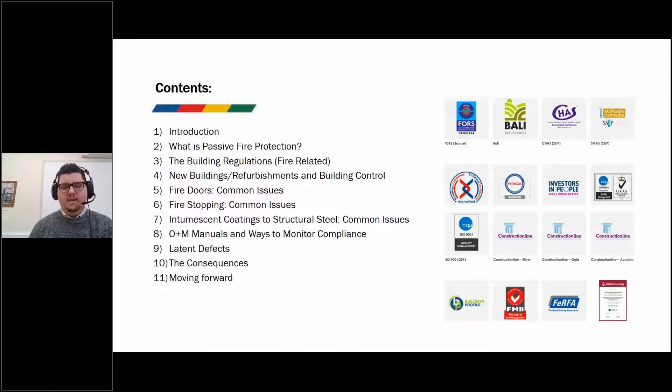So, of course, this is an insight from a contractor, a passive fire protection view, an analysis of the failings, design issues, installation methods and misinterpretations of the building regulations.

The building regulations dictate the requirements around passive fire protection and are aimed at securing the health, safety, welfare and convenience of people using or affected by a building. However, as recent history has shown, fundamental failings throughout the build process have led to destroyed buildings, liability cases, and most worryingly, loss of life.

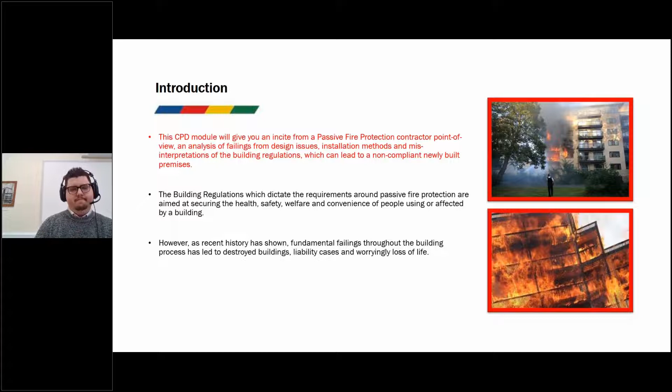So what is passive fire protection? Passive fire protection is an integral component of structural fire protection and fire safety in a building. It attempts to contain fires and slow the spread. We refer to these in the industry as fire-resistant walls, floors, and doors. These are what we refer to when we say compartment walls, and it must be to a defined and predictable period. I will touch on this a bit later.

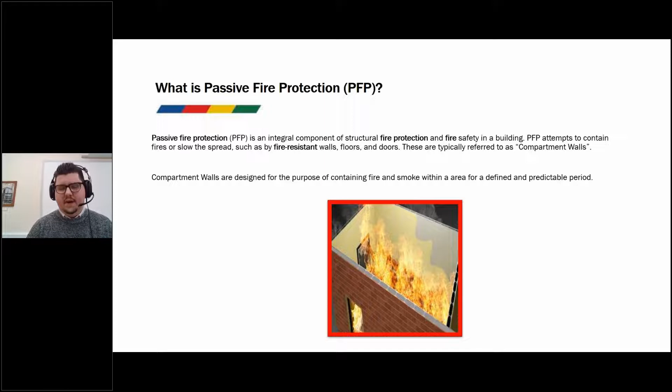So there are 5 main types of passive fire protection. The first one, and most common, is wall fire barriers, which are designed to uphold fire resistance of a wall equal to or above the wall itself.

The second most common type is cavity barriers, typically used within a roof space, which restrict the movement of smoke and flame within such a space. And identical to a wall fire barrier, a floor fire barrier is designed to stop fire spread by horizontal separation between floors.

Fire doors must act in a very similar manner to wall and floor fire barriers. However, they need to allow safe egress. And probably the least talked about element of passive fire protection is structural fire protection - the very structure of steels designed to uphold the structure of the building. They come in 2 forms, an intumescent coating or a fireboarding system, designed to reduce the structural failure time to a predictable level of performance.

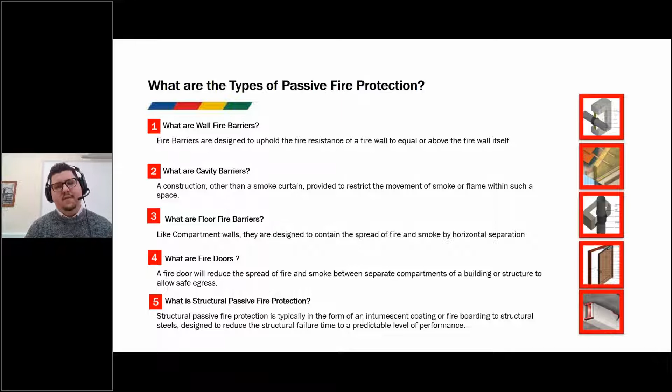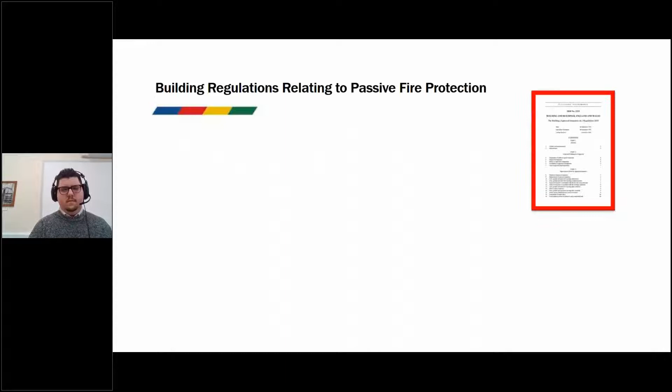The Building Regulations 2010 applies to new and refurbished premises, and it requires that fire-resisting doors and barriers should demonstrate the appropriate performance. However, born out of this document are the approved documents, which provide guidance on how to meet the building regulations in common building situations.

The first most common type with regard to fire safety is a document referred to as Approved Document B. Essentially, it states what fire rating the compartments and doors should be in certain building situations. Approved Document E relates to the resistance to the passage of sound - so if you're cutting holes in walls and installing fire barriers and doors, attention must be paid to the sound resistance between these walls.

Approved Document M is access to and use of buildings - how able-bodied and unable-bodied people interact with buildings to their convenience.

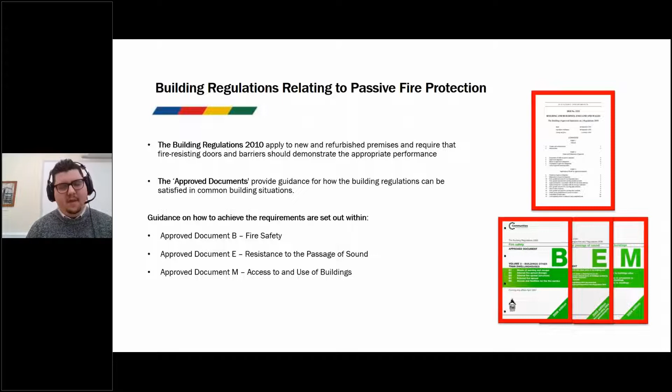So I want to focus in a little bit on Approved Document B, being the specific one with regard to fire safety. Part B of the regulations in England covers fire safety matters within and around buildings. The approved documents to Part B are in 2 volumes. The first volume being Relating to Dwellings, Volume 1.

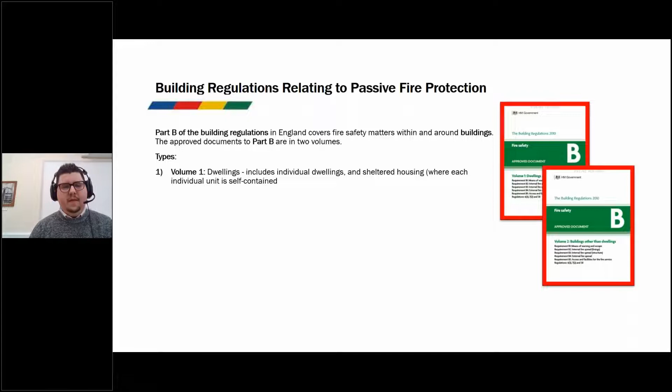It includes individual dwellings and sheltered housing, where each unit is self-contained. Volume 2 essentially covers everything else - all houses of multiple occupation, flats, student accommodation, and healthcare premises as well. It is assisted by some supplementary guidance, such as HTM 05-02, which is specific to healthcare.

There are 5 main topics covered under Approved Document B, and they go from B1 to B5. B1 is means of warning and escape. B2 is the internal fire spread of the linings of the building. B3 is the internal fire spread of the structure. B4 is external fire spread, and finally B5 is access and facilities for the fire and rescue service.

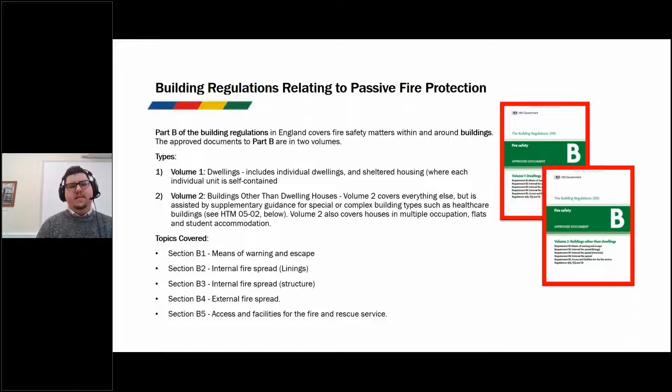Essentially, how the fire brigade gets in and out of the building safely in the event of a fire. All newly built developments must comply with the building regulations and must receive building control approval. Local authorities are responsible for enforcing building regulation. Approval can come through two means, either a private approved inspector or a local run building service.

The role of a building control inspector is to ensure that the technical standards are met, i.e. they perform a compliance role. It is a misconception that they provide a guarantee of compliance with the building regulations, and the appointment of building control does not remove the obligation of the person carrying out the work to achieve compliance.

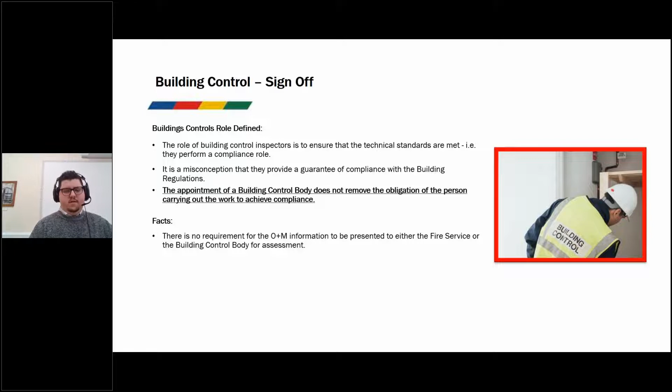Well, let's look at some of the facts. There is no requirement to provide an operation and maintenance manual, which contains fundamental information such as photographs or data sheets, to building control or the fire service on completion of the project. The inspectors are not responsible for monitoring build quality. And if you think about it, how can building control be responsible for what is an estimated 26 trades involved in the construction of a new home? They can't be competent in all areas.

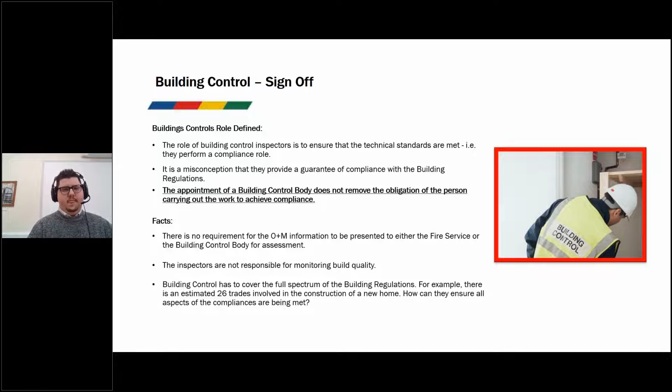I'm going to move on a little bit to fire doors and show you some real world examples and common issues. So what is the difference between a standard door and a fire door? Essentially, a fire door has undergone a test within a furnace, typically in a 3 meter by 3 meter wall, with a door installed and then exposed to high temperatures to measure the rate of failure, resulting in the timeline of how long the door should last.

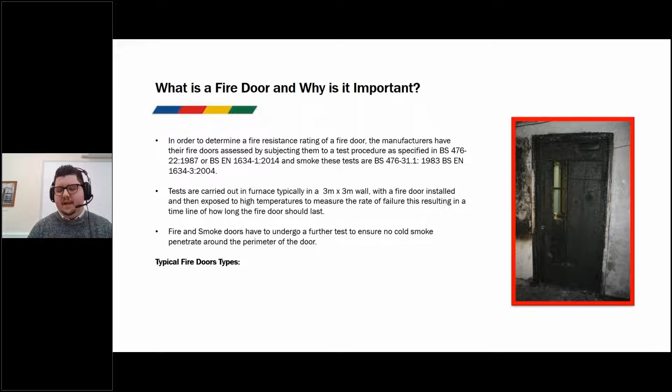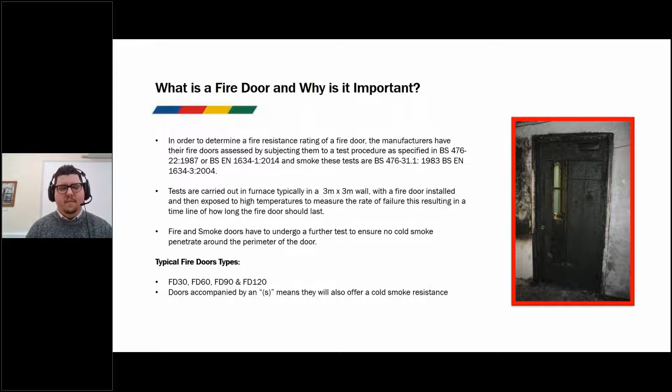Fire and smoke doors, however, must undergo a further test to ensure no cold smoke penetrates around the frame of the door. The typical fire ratings of doors come in FD30, 60, 90, and 120. However, doors accompanied by an S means they will also offer cold smoke resistance.

There are two categories of testing around fire doors. The first is primary test evidence, which in short means that all of the components of a door, combined with its frame and ironmongery, are assembled and tested in a furnace, and it achieves a certain fire rating. Then, from the manufacturer, that assembly is replicated direct to the installer for them to fit within the aperture.

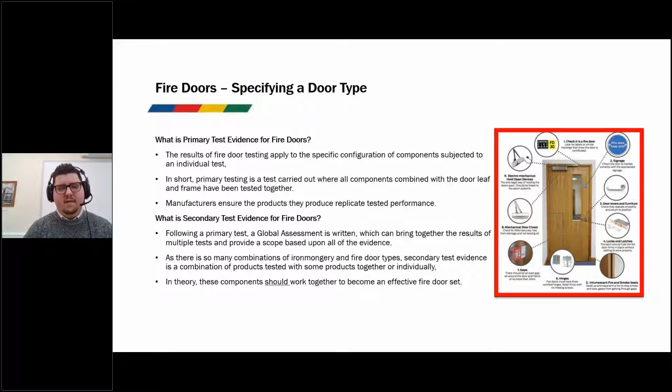Secondary test data typically follows a primary test. A global assessment is written, which brings together the results of multiple tests and provides a scope based on all of the evidence. There are so many combinations of different ironmongery, door types and frames. The logic is that if any of these components were tested together or separately, as long as they've been subjected to the same test, they should work together in tandem in a fire, but it cannot be guaranteed.

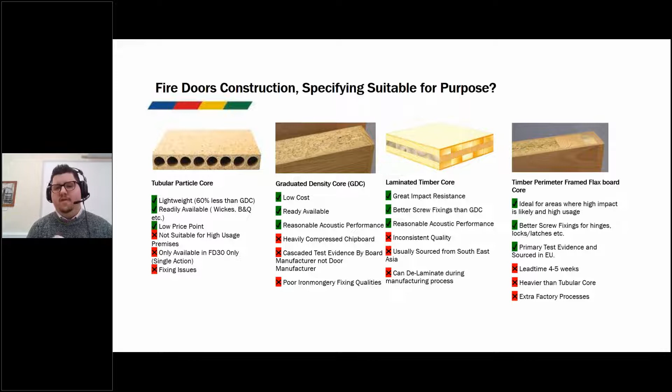We're going to look at 4 different door cores, all of which have been subjected to the same fire door test, BS 476. But visually, looking from left to right, you can see a tubular particle door, which seems less robust than the one on the far right. These types of doors, tubular particle doors, are readily available in places like Wickes and B&Q. As we move through the graduated density cores and laminated cores, right up to timber perimeter framed flaxboard cores, they are suitable for more high impact and high usage situations.

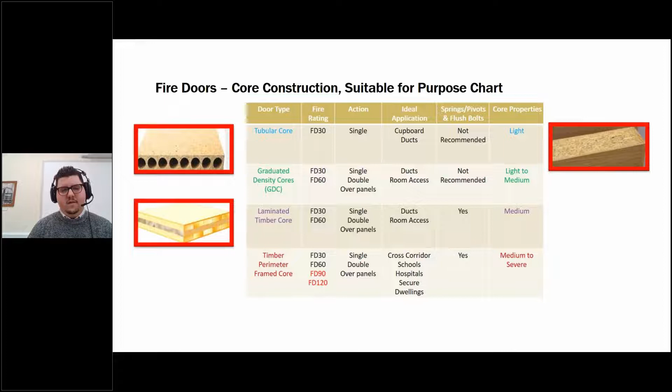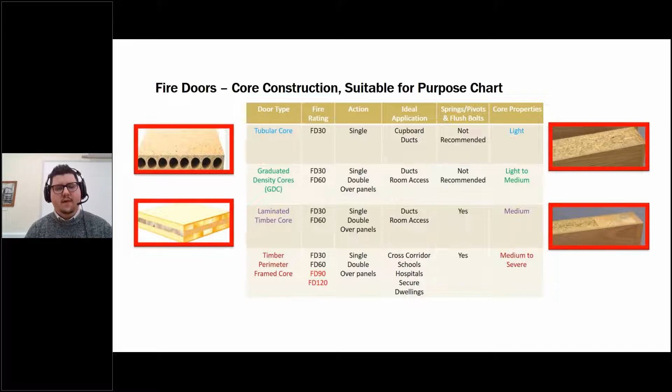Let me explain that a little further. On the top left is an example of a tubular core door. Its ideal application is in a cupboard or duct, similar to our graduated density cores and laminated timber cores. The idea is that the example on the top left is less robust than the example on the bottom right, because those doors open and close far less frequently than the example on the bottom right, which is typically recommended in cross corridors, schools, hospitals, and secure dwellings.

Manufacturers which supply doors specify key guidance on how doors should be stored. Doors should be stored flat on a level and dry surface, kept clear of the floor on at least 3 robust bearers. They should be stacked to avoid double handling, and not stacked so they're exposed to daylight, causing discoloration. Door sets with projecting sills, such as vision panels, must have spacers between them to avoid damage.

Why would all of this criteria be around fire doors? Well, take the example on the left-hand side, this was on a new build. BM Trada, in their approved repair techniques guide, state that after adjustment, the leaf should not be proud of the door or frame by more than 1 millimeter on top or 3 millimeters on the bottom. So it should not be proud of that. Now, as we know, timber, when not stored flat and exposed to moisture, warps, so you cannot guarantee that door will be effective in a fire scenario.

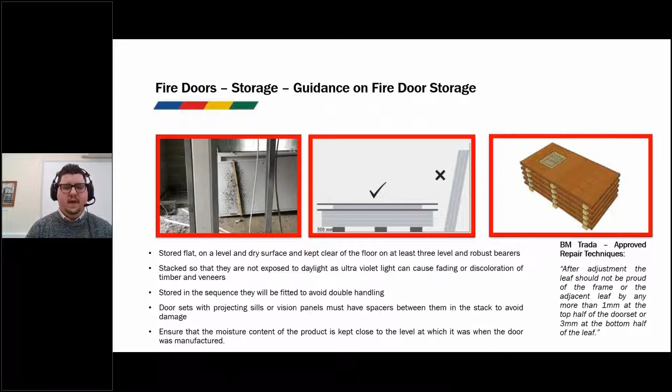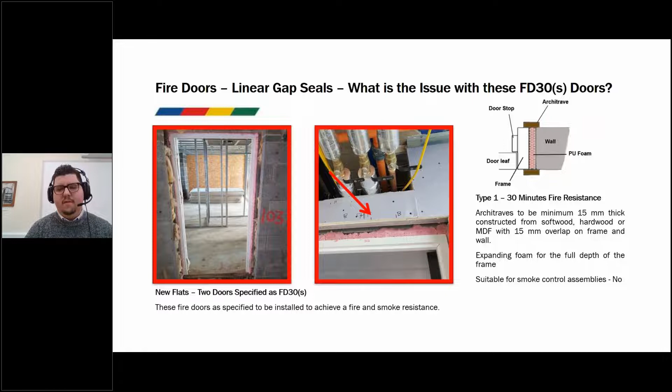Probably the most common issue we find on site. We spoke earlier about fire resistance of doors and what the rating means, accompanied by an S. So this is new flats, with 2 doors specified as FD30S. However, digging into the British standards - I've got a document referenced as BS 8214, the Timber Fire Door Resistance Assemblies Guide - it specifies that this detail is suitable, however, it's not suitable for smoke control assemblies. And of course, the PU foam must be tested in a linear gap around the door.

Here's a typical example of one done correctly. Again, referencing the same standard, showing the PU foam being used in the center, capped off either side with a white intumescent. And again, digging through the details, this situation is suitable for a smoke control assembly.

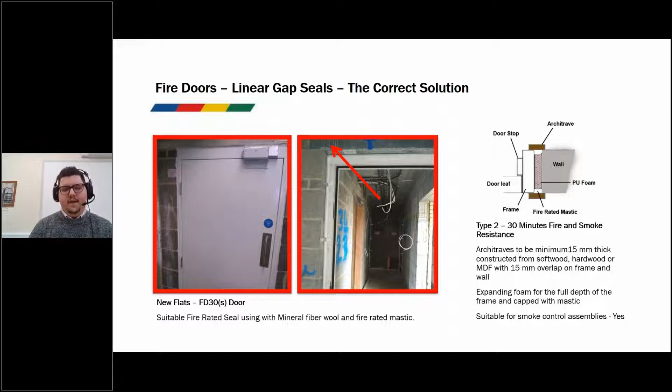A very common issue we find on site is threshold gaps—the gap between the bottom of the door and the floor covering. Manufacturers typically stipulate different varying degrees of millimeters which they've tested to, be it 6, 8, or 10 millimeters. However, this is only suitable for fire resistant standards. Let me come to this in a moment.

This example on the far right is in an apartment block. The door is specified as being an FD60S door. However, this has been signed off previously and it's come to light there's been extensive issues. On referencing the technical standards, BS 8214, it specifies that the bottom edge gap must be no more than 3 millimeters from the floor. Now, of course, where this is impractical, there are devices out there to counteract this.

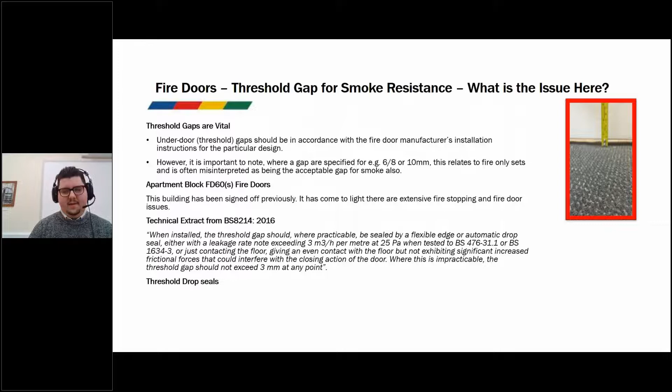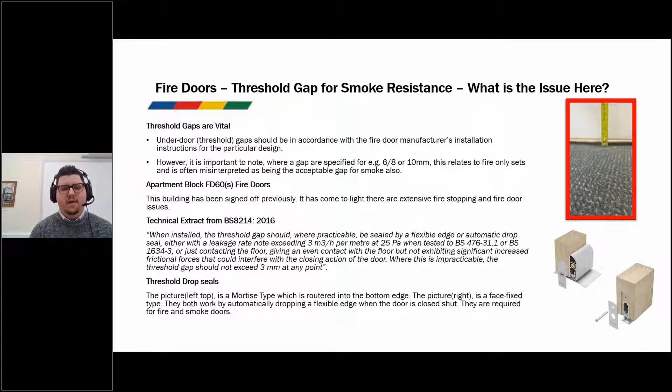So you would work in line with the fire resistance standards of 6, 8, or 10 mil in combination with a flexible edge, known as a drop seal, shown in the bottom right-hand corner. These come in 2 types: you can either get a face fixed one on the door, or you can also have a mortise type which sits within the door itself.

We spoke a little bit about fire and smoke doors and fire-only seals. A fire and smoke door is typically identified by having an intumescent seal with a graphite or sodium silicate interior, and typically it would be a flat entrance door, a stair core, doors protecting a means of escape, or also riser doors. Fire-only doors would typically be expected on internal flat doors or toilets.

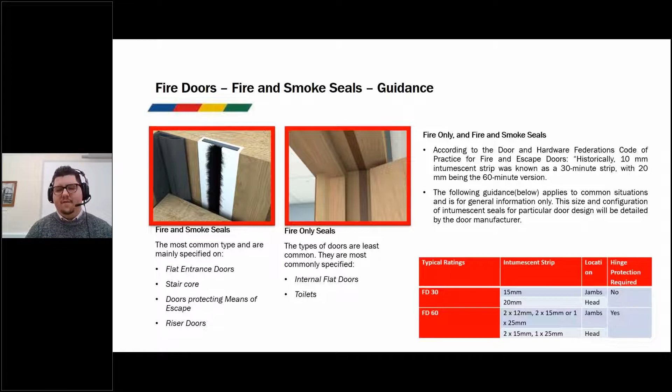According to the Door and Hardware Federation, historically a 10 mil strip was considered acceptable for an FD30 door, and a 20 mil strip acceptable for an FD60. Of course, that was wrong then, and it's wrong now. The following guidance really should come from the manufacturer as to what they've tested with their doors, and this should be followed. However, general guidance they have submitted out as what you should commonly expect to see is in the bottom right-hand corner.

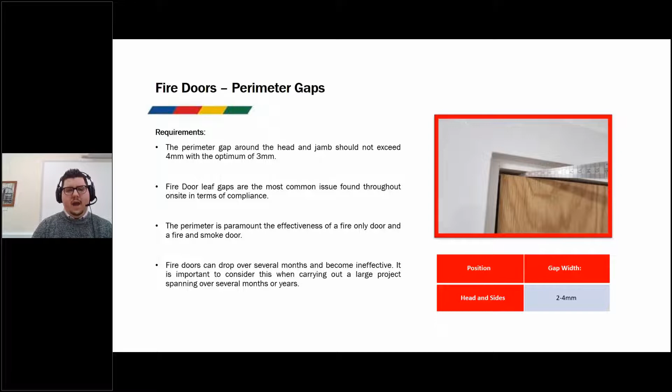Fire door leaf gaps are the most common issue found throughout the site in terms of compliance, and the perimeter gap around the door is paramount. The reason being, if you draw your memory back to the last image where it shows the brush making contact with the door leaf—that brush make is 4 millimeters. If the gap exceeds 4 millimeters, the door is no longer providing cold smoke resistance. And of course, over several months, doors can drop, meaning this cold smoke seal is ineffective.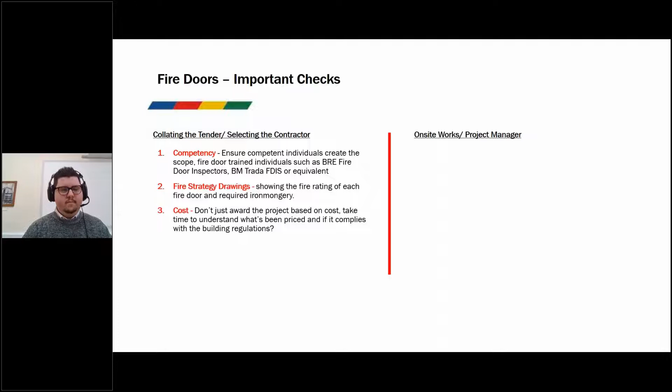So some important checks to take away from what we've just been talking about: ensure that the specifications have been drafted up by competent individuals, and ensure that they're provided with the fire strategy drawings so they know the specific fire rating and smoke resistance of each door. And of course, we see far too many contracts being awarded just on cost.

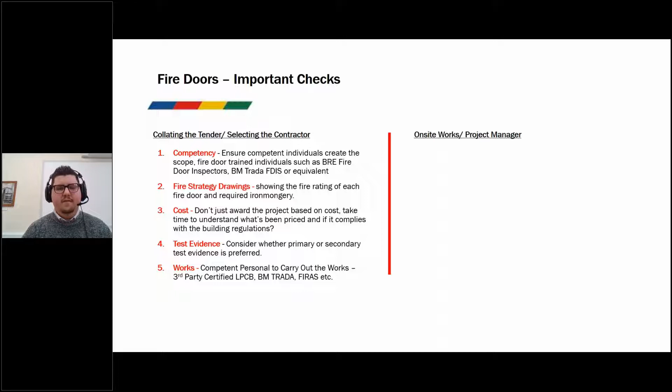Consider whether your client may want primary or secondary test data. And of course, the works must be carried out by a competent individual with a relevant third-party certified scheme.

We've spoken about storage earlier on and how key that is to ensuring the door is effective. And of course, on longer-term projects, ensure that doors installed earlier on rather than several months later have been checked so the gaps are still in line with tolerance when being handed over. And of course, the trades around the fire door creating the walls must ensure they are formed suitably so that the door can be installed to a compliant condition.

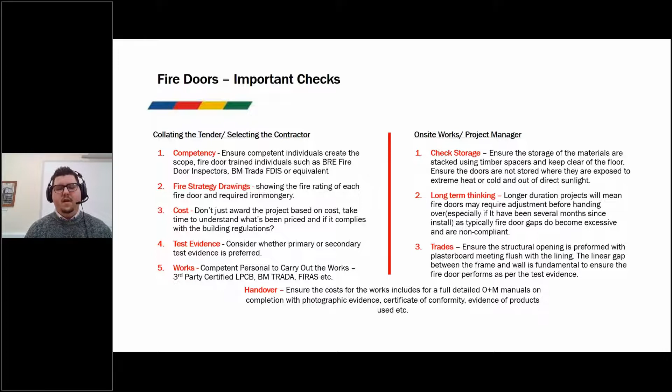And finally, the handover, also referred to as the O&M manual—ensure that this includes full detailed information of photographic evidence, certificates of conformity, and evidence of the products used to prove that they work in those scenarios.

In terms of fire stopping, it's tested in a very similar manner to that of a fire door—tested in a furnace, subjected to extreme temperatures. However, the main difference is that a service is passing through. Look at the example on the top right-hand side: that white boarding system you can see is typically referred to as a fire batt system.

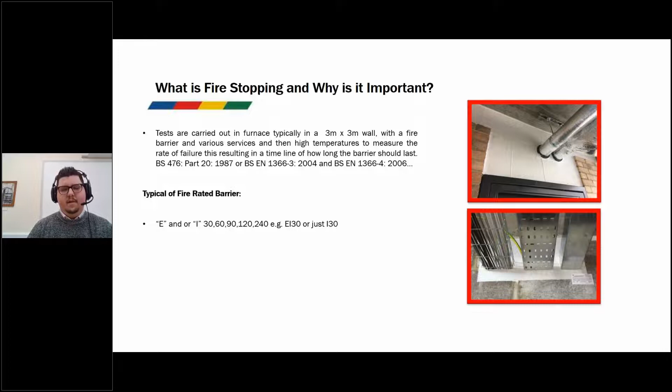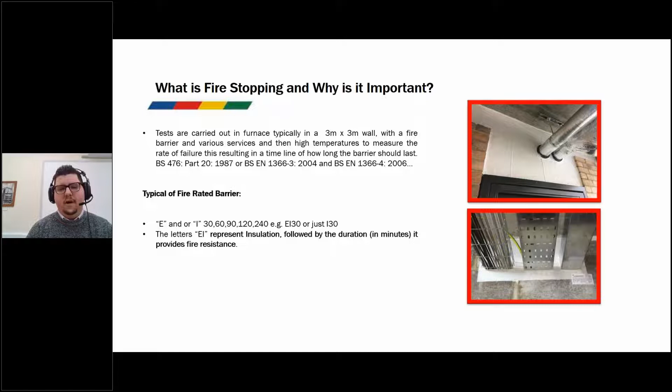Some general rules of thumb as we move to fire stopping: services that are combustible are typically wrapped in a dark grey or black material, and this expands and crushes the pipe when exposed to high heat. Fire stopping typically comes in the form of EI 30, 60, 90, and 120. So we typically get a specification like EI 30 or I 30, and what these letters represent is insulation followed by the duration in minutes it takes to provide the fire resistance.

A huge issue we have seen over the last number of years as a contractor is house builders splitting the fire stopping across multiple trades. The example on the left-hand side shows a drywall system, which the drywallers actually installed the fire mastic to the head, well, what we perceive to be fire mastic, and has left clear and obvious gaps to the head.

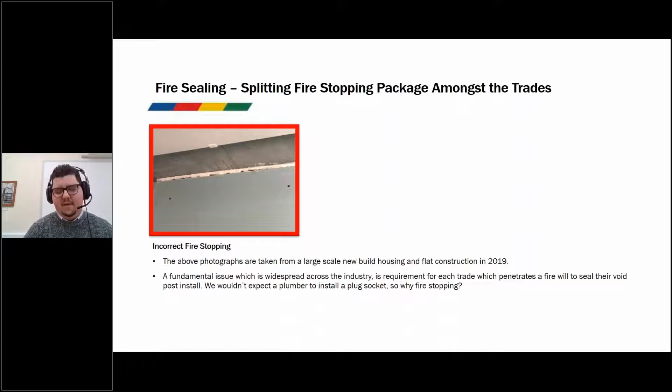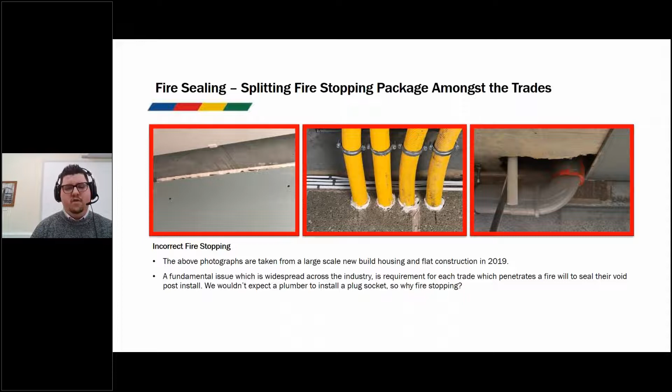We did speak about white boarding systems, and if it's black, it usually expands and crushes. This is 4 plastic pipes. As heat is exposed to them, they will melt away, which means you'll be left with 4 holes within your wall. The example on the right doesn't need too much explanation. They've went to the trouble of wrapping the pipe, but never put a fire batt system in place, leaving a big gaping void. Would you trust a plumber to install an electrical socket? Why is this being done?

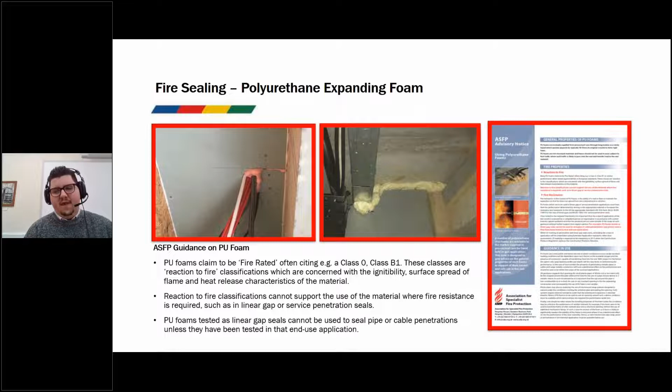Polyurethane expanding foam is also a major issue across fire stopping. It's typically cited as being fire rated. However, these classifications usually are Class 0 or B1. These classes are reaction to fire classifications that are concerned with ignitability, surface spread of flame, and heat release characteristics of material. Reaction to fire cannot be misinterpreted as being fire resistant, and the ASFP have issued multiple advisory notes on this.

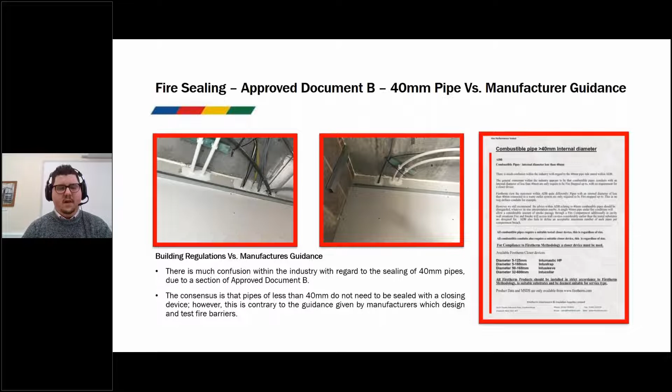Let me put a real world example to you here. Again, going back to if it's white, it typically doesn't expand. If it's black or dark gray, it expands. Look at the example on the top left, 2 plastic pipes in a new build development going through a wall. Approved document B, there is a misinterpretation or a consensus that pipes of less than 40 millimeters do not need to be sealed with a closing device. However, this is massively contrary to manufacturer's guidance. Let me throw an example at you to labor my point.

If you can imagine yourself in a 20-foot cubed room and you put a pencil hole between the compartments, how long would it take for that room to fill with smoke to such a thickness you cannot see your hands 18 inches in front of your face? Many of you are probably in rooms not even 20 foot cubed, and the answer is 3 minutes and 40 seconds. Let me take you on and show you some more about this.

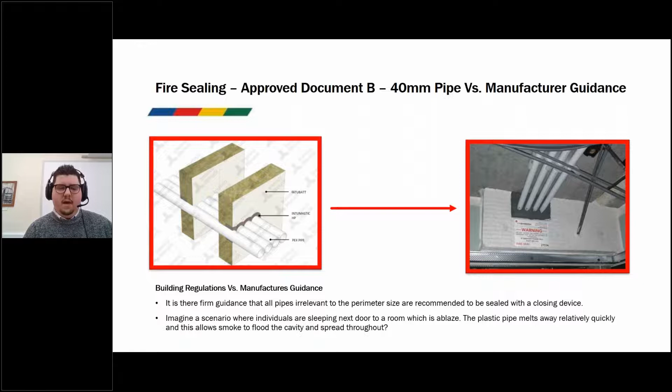On the left hand side is a manufacturing detail showing the fire batt system in combination with the mastic or the black material around the pipes. Imagine a scenario where individuals are sleeping next door to a room which is ablaze. These plastic pipes, of course, represent voids far bigger than a pencil hole. Imagine how quickly it would take for that room to fill with smoke.

Huge design issues we've come up against in our time. Look at the example on the right, a pipe penetrating a wall at the same line as a ceiling structure. In order for us to install our batt system shown on the right-hand side, we must achieve an overlap around the surface. This is between 75 to 100 mil. In this case, we simply cannot do it.

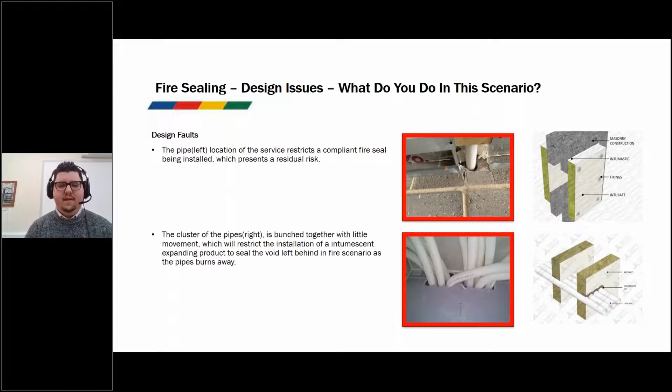The example down the bottom shows a huge cluster of pipes which are bunched together with little or no movement. It restricts the installation of the expanding product to seal the void left behind in a fire scenario. Again, we cannot install compliant details after other trades.

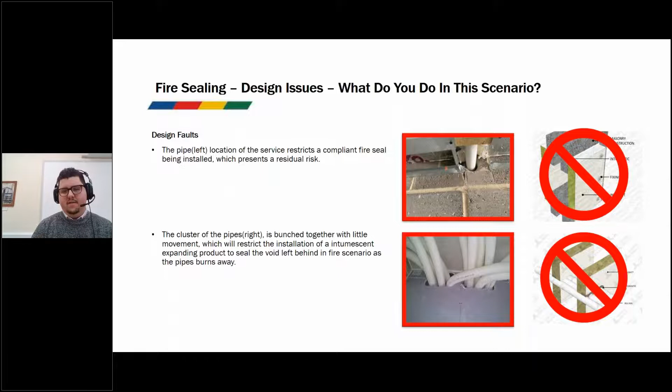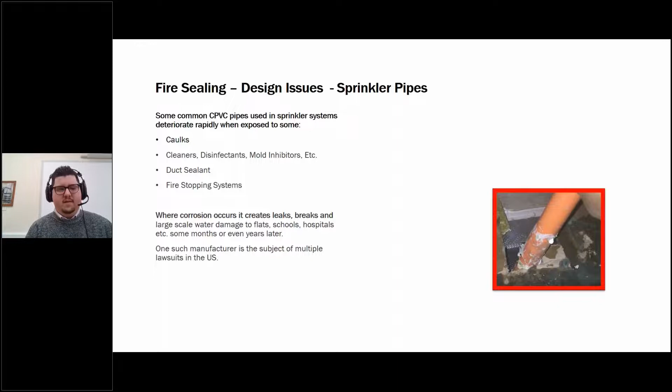Of anything today, I want you to take particular note about what I'm going to talk about, because this is relatively new within the industry. It's come into fruition in the last couple of years. Sprinkler pipes are mainly made of CPVC these days. It's far more cost effective than the old metal type. Unfortunately, what's come to light is some CPVC pipes deteriorate rapidly when exposed to caulks, cleaners, duct sealants, and unfortunately, fire-stopping products. Where this corrosion occurs, it creates leaks, breaks, and large-scale water damage to schools, flats, and hospitals. It can take months, sometimes even years later. One such manufacturer, which is operating in the UK currently, is subject of a multitude of lawsuits.

The image which has just appeared shows an example of how this was fire stopped up until recently by creating a foil barrier around the actual pipe, keeping it separated from any fire stop materials, not to encourage any corrosion.

Some important checks for you from what we've just spoken about. Ensure that these specifications are created by competent individuals.

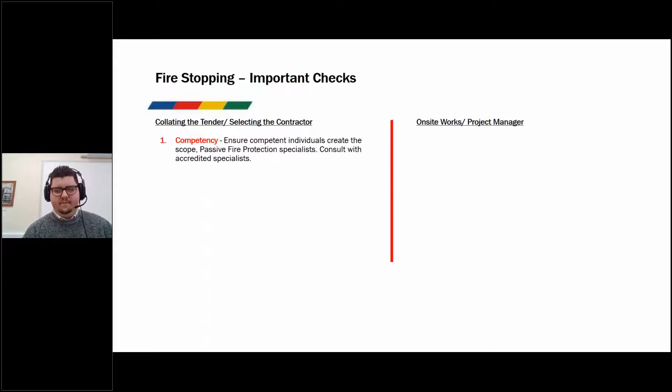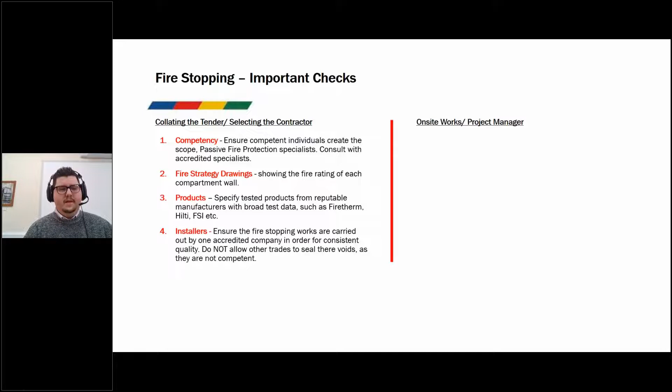They must have the fire strategy drawings in order to dictate what fire resistance the barriers need to be. Make sure they're specifying suitable and reputable manufacturers that have test data for their products. And the installers themselves, or the company, must be accredited to install these products.

On the trades, they must ensure they eliminate unnecessary variation costs by allowing adequate room to install these fire products. We've just seen an example with the ceiling height, which ensures that the fire barrier can be installed with a suitable 100 mil overlap. And any trades such as plumbers or electricians should be making as small a void in a wall as possible to minimize the amount of material, and that is less cost.

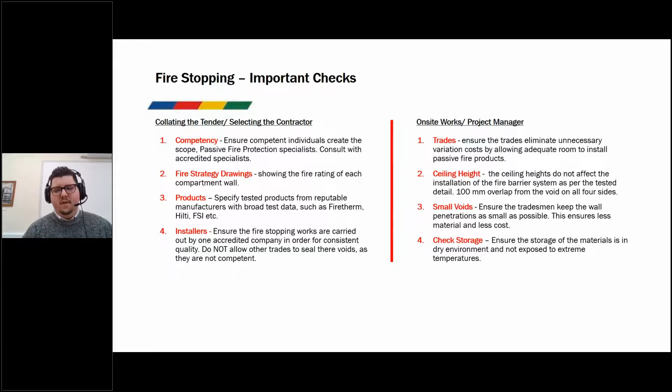Fire stop materials, in a similar fashion to doors, are very temperamental to extreme temperatures. To ensure this, they must be stored above 5 degrees and less than 30.

And on handover, this is fundamental with fire stopping. Ensure that all of the information is being collected in the form of an O&M manual with test data showing how the products are used, and photographic evidence of the process before, during, and after. It's the only sure way you know it's been done correctly.

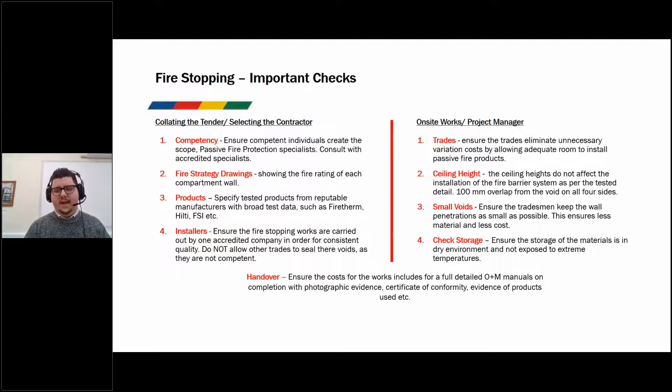As I touched on earlier, probably one of the least talked about elements of passive fire protection, but probably the most important, is intumescent coatings on structural steel.

Intumescent coatings are tested in a furnace in a very similar manner to fire doors and fire stopping. However, as structural steel, by its very nature, holds a building up under extreme load, these tests are carried out whilst the steel is under extreme load and exposed to the same high temperatures to measure the rate of failure.

The type of fire resistance typically comes in 30, 60, 90, all the way up to 240 minutes, and the I typically stands for insulation.

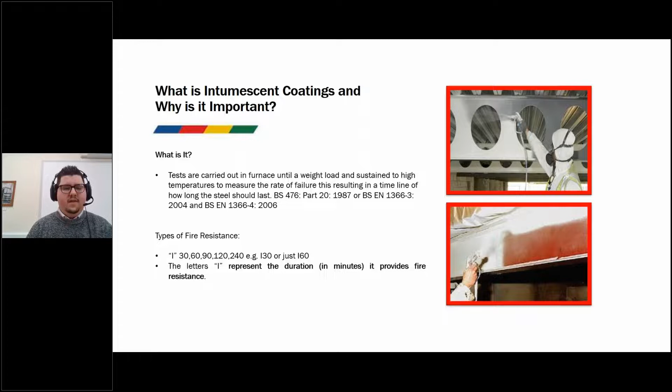The one major issue with intumescent coatings is that they're hugely temperamental. Intumescent coatings must be applied over structural steel that has been newly primed. The condition and age of the primer is very important, and it must be compatible with the intumescent product selected.

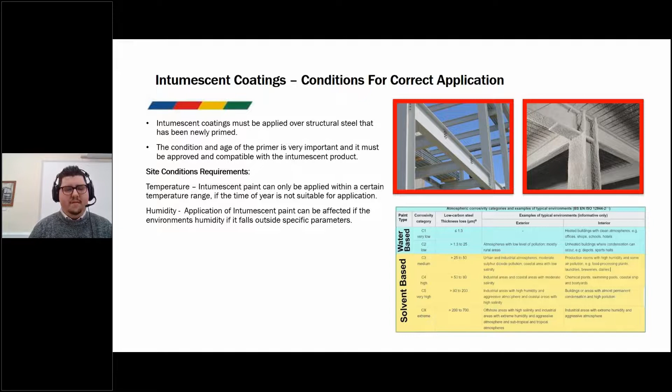Intumescent coatings are hugely temperamental to temperature. They must be within a certain temperature range to be applied. They're also hugely temperamental to humidity, and can be affected if the environment's humidity falls outside certain parameters. And the dew point, which causes water droplets to condense, can affect the curing time.

There are two main types of intumescent coatings: water-based and solvent-based. The reason for the separation is that water-based is typically far more cost-effective. However, it's suitable only for C1 and C2 type environments, which are more forgiving environments like heated or unheated buildings that are fully encased. C3 to C5 environments are much harsher environments, such as industrial areas, swimming pools, or any areas of high humidity.

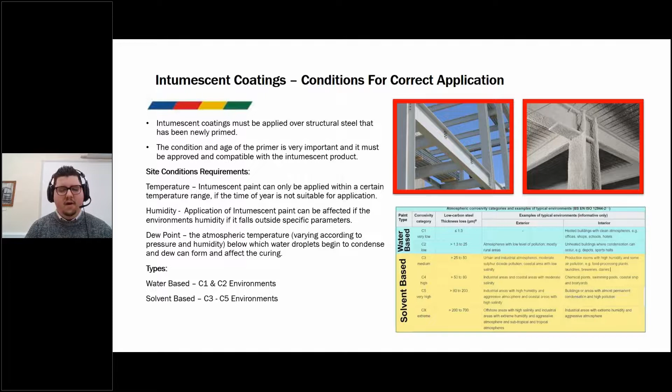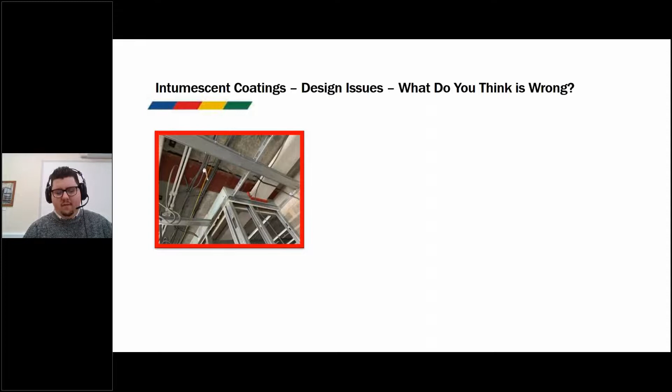Recently, we were involved in a project where we'd tendered for it, won it, and came to site to do a pre-site walkaround. The site team had other ideas by installing several services over the intumescent, or over the structural steel, meaning we couldn't apply our intumescent coatings around the surfaces, around the steel itself.

The major problem with that is, if you're not protecting the steel and it's designed to withhold the structure, it could cause a collapse of the building in a fire scenario.

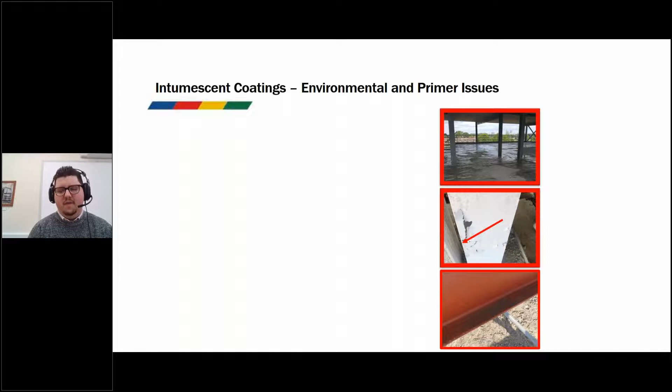The example on the bottom right shows a priming issue, where priming has been removed from the steel. It's either not been correctly applied in the factory, or it's been scraped off on site when it's been moved into position.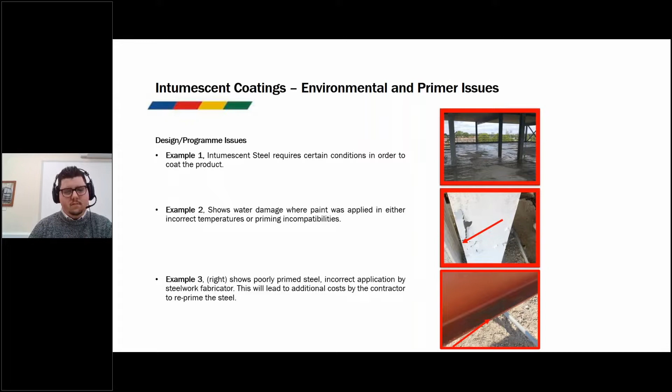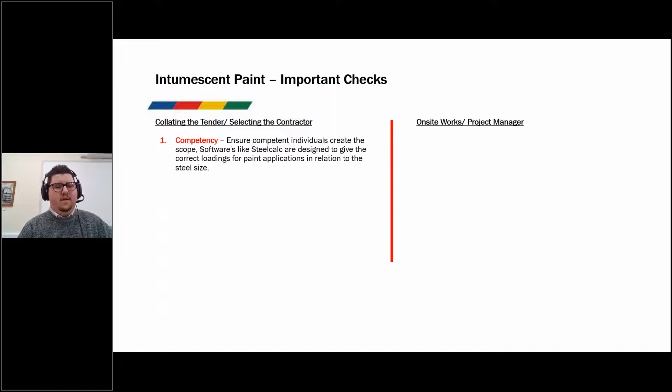We know steel is obviously hugely temperamental with intumescent coatings, so it is imperative you have a competent individual. Software designed to create calculations, like Steelcalc, is designed to give correct loadings of how many microns of paint need to be applied in relation to the steel size to give the correct fire rating.

The fire strategy drawings are imperative in order to create these Steelcalc estimations of how much intumescent coating should be applied. And ensure reputable products are used from manufacturers such as Sherwin-Williams or Nullifire, which have test data to back up their products. Ensure that the installer is suitably trained and competent to apply intumescent coating.

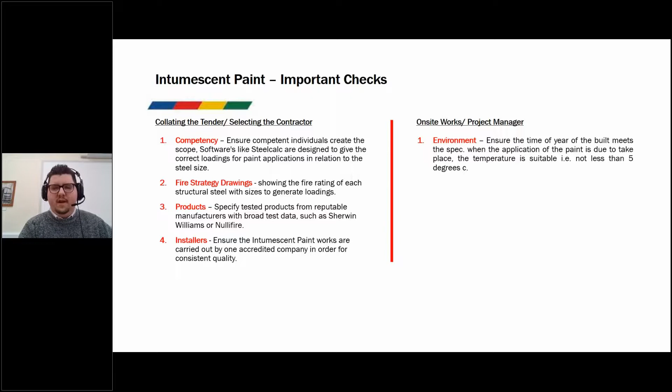Consider the time of year when you're specifying projects like this, and whether it's water-based or solvent-based paint, based on when the building will be coming out of the ground. Ensure that the program timing is right, and that no services are in the way or restrict the spraying of the paint.

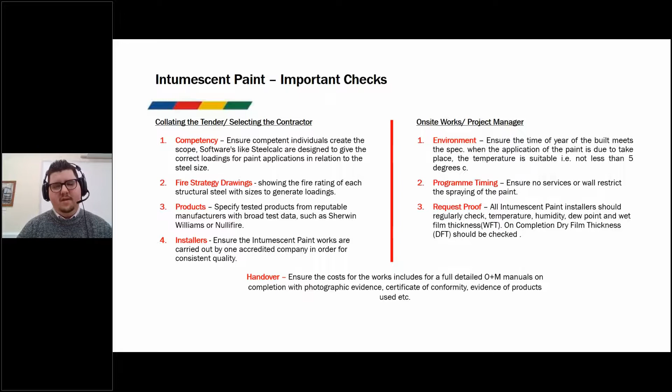All intumescent paint installers should regularly check temperature, humidity, and dew point as they go about their day to ensure they're applying the correct amount of paint within the right conditions. All of this information should be collated in a handover document with DFT measurements, photographs, and the linked locations of where this intumescent paint is being applied.

There are quite a lot of technical elements across fire doors and fire stoppings. How can a client monitor this? Well, the benefit is that Regulation 38, Part B of Schedule 1, imposes a legal requirement for the fire safety operative carrying out the work to provide fire safety information to the responsible person not later than the date of completion of the work or the date of occupation of the building or extension, whichever is earlier.

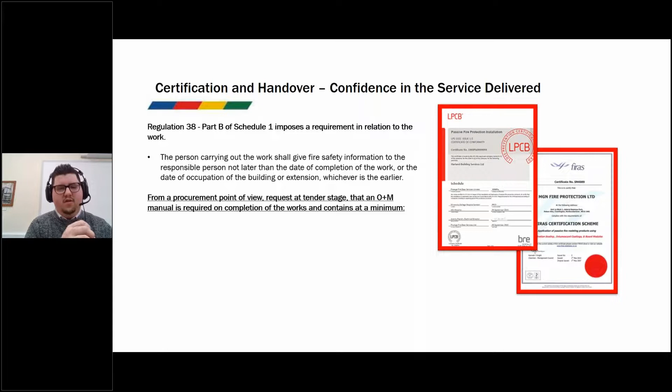The unfortunate part about this regulation is it does not specify exactly what should be within that document—whether it should have certs or photographs, etc. But from a contractor's point of view, we would always recommend you have a third-party certificate, photographic evidence of the works completed with test details to prove installation methods are not ad hoc, and data sheets for the material used and delivery notes to prove that is the material used.

Marked location drawings are very important to identify where this paint has been applied. Finally, one area I don't see being challenged or included by most contractors is what we refer to as a residual risk list, which details if the works could not be carried out in a certain area.

Throughout my time, there are certain projects where physically it's not possible to install a fire barrier. If it's not possible, it must be made aware to the client so they can use alternative measures such as sprinkler systems or even fire extinguishers to mitigate the risk. This is something I've not seen done through a lot of contractors.

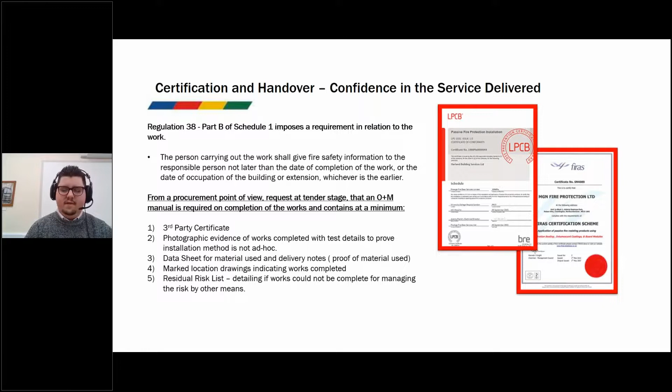Born out of Regulation 38 are many softwares on the market. These softwares are designed to form the basis of a handover. Essentially, each operative has a device in their pocket, and as they go about their day, they record the process of what they're doing—whether that's a fire door, recording the removal of an existing door, all the way through to the process of it being finished.

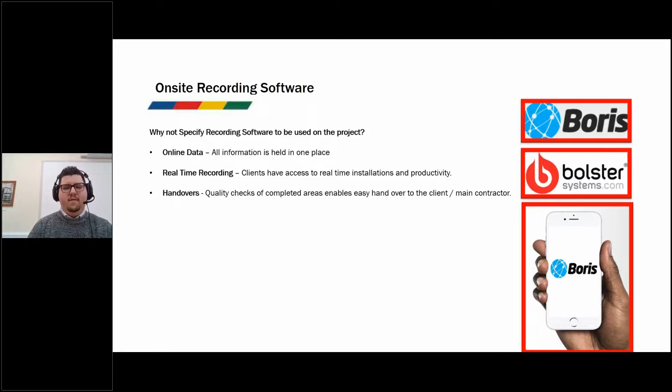It has real-time recording, so clients can have access to that from their side. It forms the basis for any good handover to provide to the client or main contractor. It also controls health and safety and ensures that risk assessments are signed each morning before they start, and of course it monitors cost and productivity as well.

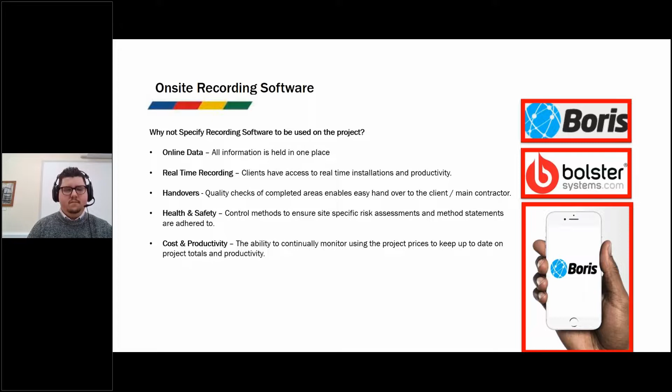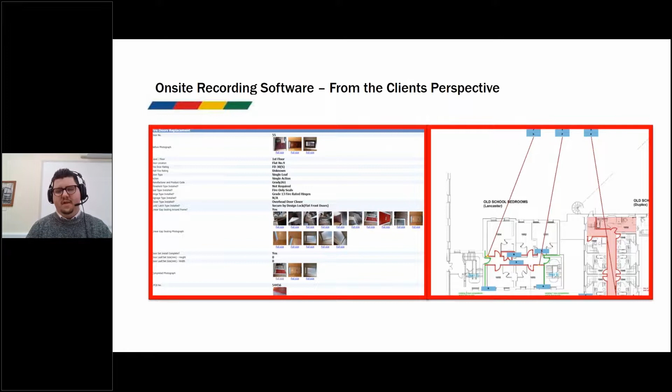We've spoken about latent defects, and it's taken till now to define them. What is a latent defect? It is a defect in a property due to a defect in design, materials, workmanship, or supervision of contractors, or site preparation works, which existed at the time but was not apparent on completion of the building works.

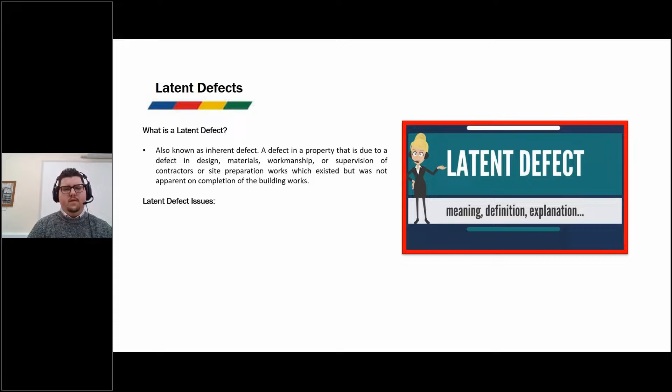Some real-world examples for you: in 2018, a BBC Watchdog Live investigation found that two large housing contractors had failed to meet the building regulations, and found 37% of homes had no fire barriers installed. This project had been signed off, with people inhabiting these homes, putting these inhabitants at risk.

We ourselves have carried out fire protection works on behalf of a large housing construction company which had extensive issues on 8 large multi-story purpose-built flats built in 2012. The insurance firm had refused to insure these buildings unless the works were carried out. In the interim, they were forced to have fire marshals on each and every level of these buildings 24 hours a day, at a cost of £50,000 per annum.

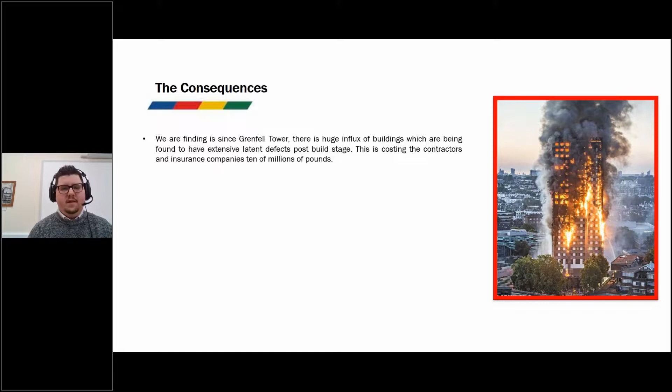Since Grenfell, we're finding as a contractor that there's a huge influx of buildings being found to have extensive latent defects post-build stage. This is costing contractors and insurance companies tens of millions of pounds.

Following Grenfell, government testing of glass reinforced plastic doors, typically referred to as GRP flat entrance doors, found 75% of them had failed the test in the furnace from at least one side. Actions have been outlined over the last couple of years across the GRP composite market to raise the standards.

Approved Document B has since been redrafted to clarify its language and content in line with the department's style guide for approved documents, as well as trying to ensure the document uses plain English. The document has been significantly restructured. In 2006, the two volumes of ADB were split between dwelling houses and all other buildings, which we spoke about earlier. This split was inconsistent with other approved documents, and they've now moved flats back into volume 1.

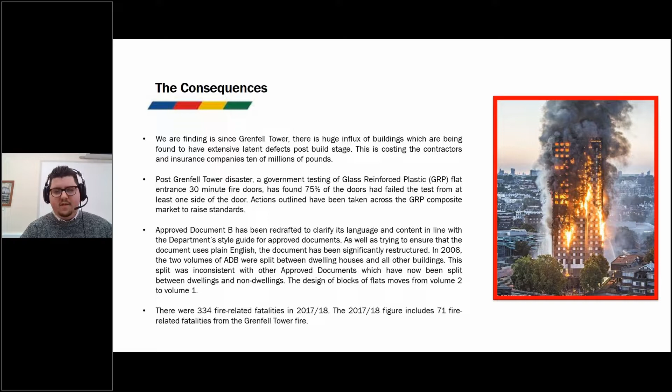And of course, the most shocking fact of all is there were 334 fire-related fatalities in 2017 and 18, of which 71 related to the Grenfell Tower.

So it's clear, I hope, from what I've spoken about today, that there are still fundamental failings with regard to passive fire protection happening on our new developments. We have to realise we all have a responsibility within passive fire protection to get it right the first time. We cannot rely solely on building control as a means to ensure the buildings are safe.

We spoke earlier about the 26 trades. How can they be competent?

I hope you can take some points from today and use them on your next fire-related project. The aim is to provide safeguarding to the families living within these homes and flats in the event of a fire. And our little slogan at the moment is: fire imposes risks to everyone, and we all have an involvement to make a change.

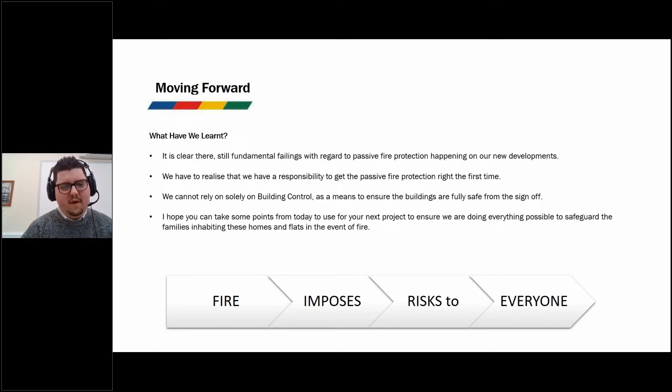Thank you for your time, and thank you very much for listening to me. I would love the opportunity, if you have any questions, to put my way to assist. Thank you all.

Thank you, Ross. That was really good, really interesting. Quite technical, but quite scary in places. I think some of those photos of gaps in the fire seals were particularly scary. And that stat towards the end about 75% of doors failing testing is quite unnerving.

We've got a few questions in. First is about British standards, and whether there are different British standards applying for different types of premises to determine fire structures. Approved Document B is basically the foundation of all fire safety. However, as you deviate into buildings like healthcare or purpose-built flats, there are other documents out there. For example, in healthcare there's a document called Health Technical Memorandum 0502, or in flats you'd have a purpose-built guide document issued by the government. So it's basically a layer on top of Approved Document B, but that still forms the foundation.

Are there fire foams tested for use around a door frame for fire and smoke purposes? Yes, there are. There's a specific product out there called Blue 60, manufactured by a company called Astroflame, which has been tested for fire and smoke purposes.